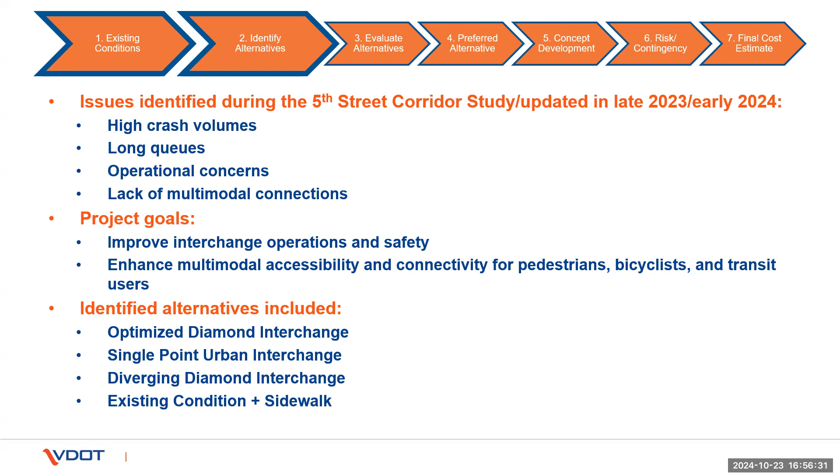This is the concept we put in for the application, which shows the DDI. It also includes a shared use path across the bridge through the median, and connects to the shared use trail that's already funded on the north end, and ties into the sidewalk on the south end of the project. This was adopted as the preferred alternative from public feedback, as well as what was initially recommended in the previous study.

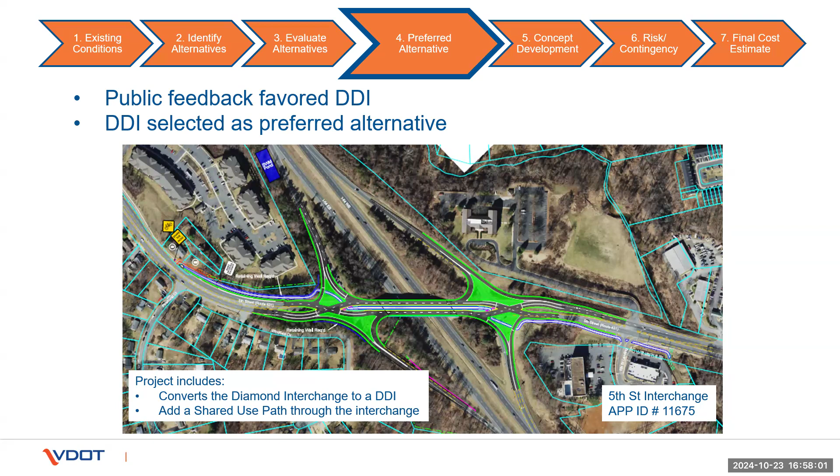So basically, this is the process we went through. We started in the fall looking at the existing conditions. By January, we identified and evaluated the alternatives early in the year, and came up with a preferred alternative by May. Then we had to develop the concepts, evaluate the risk, and put together the final cost estimate.

And that's the issue, because once you get the preferred alternative, there's no loop, or the loop takes more time than what we had available. That's why we couldn't go back and look at a different alternative with less impact on the bridge. We could have looked at a divergent diamond with a separate bike-ped bridge adjacent to the structure, and might not have had to address the bridge replacement issue while still doing the divergent diamond.

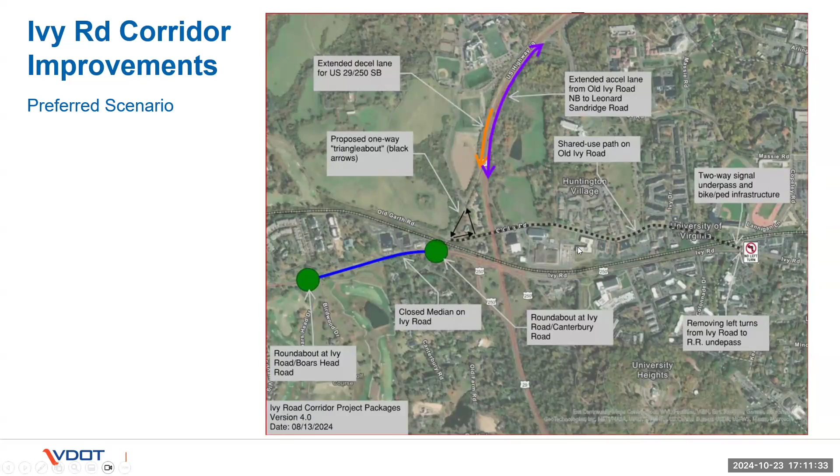Any questions about that? Well, I can go into the other ones. There's some other long-term recommendations—I mean, suggestions, not really recommendations. There's not a lot of needs out to the west of there where you really need to look at these right now, but we looked at the whole corridor to provide some suggestions to the county as to what they may want to consider if they want to pursue projects out in this area, or when needs start to develop. Right now there's not a lot of issues out there currently, but these would be there for consideration.

The connector road, which makes sense. There's stub outs at the east end and the west end.

Roundabout at Farmington—now, we could do this. I know there's been some skepticism about it because of the railroad crossing. But if you add a left turn lane and signalize the left turn lane and the right turn lane in the westbound direction, when the railroad crossing is closed, the roundabout would still operate because you could just stop those volumes that would be going into Farmington, so they wouldn't enter the roundabout. So there's some options there, but like I said, these are some long-term solutions if the county wants to consider them.

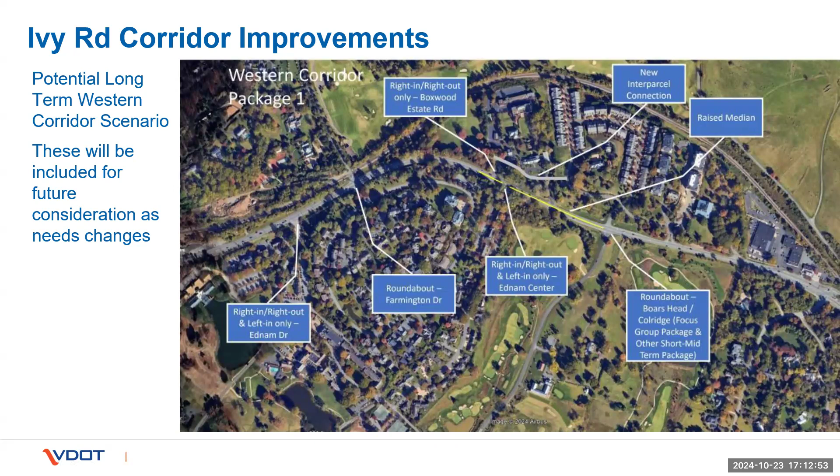Is there—I can't tell from this map—is there any bike ped infrastructure?

Out on these, when we did the study, we weren't really sure, because there's a Three Notch'd Trail study, so where the trail's actually going to go and where the facilities would be are still up in the air. We're not precluding it in the study. And I know when we did some of the initial work for the White Gables development, we actually had a shared use path shown on the concept along 250 for a short section of the road. It was never built as part of the development project.

But we need to figure out where they want to run it, because you could run it through the south side through the Boar's Head property. There's a lot of options, so I didn't want to put it somewhere and have that not be where we're going to put it, so it's left open for future consideration.

Okay, thanks, because I know there is a bike lane when you get closer to town on 250.

Yeah. So, once you get to Old Ivy Road at the east end, the shared use path, you can actually take it all the way to Old Garth Road. The issue is going to come in at the underpass at the west end, because there's not capacity there for getting bikes underneath the underpass. So we need to know where the Three Notch'd Trail is going to go before we can really plan where we're going with the bike lanes continuing west from this point on, because we don't necessarily know where the alignment's going to be.

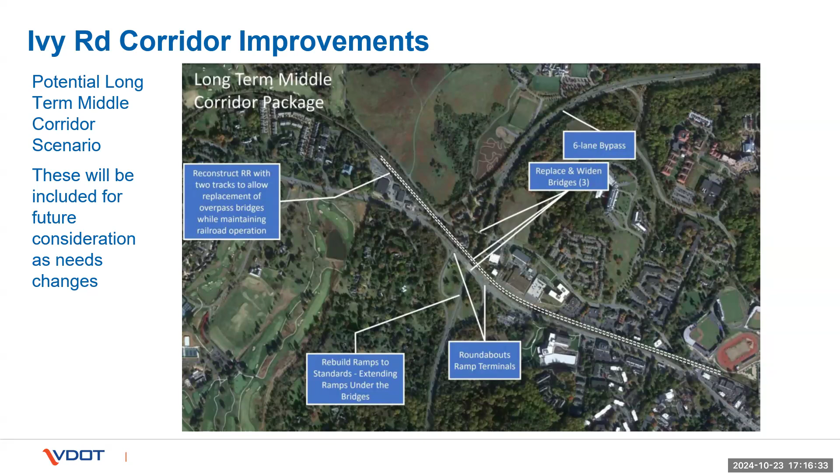Let's see, the next one is the stuff on the east end. These are some other additional improvements that the city or the county might want to consider for the various intersections between Old Ivy Road and the interchange.

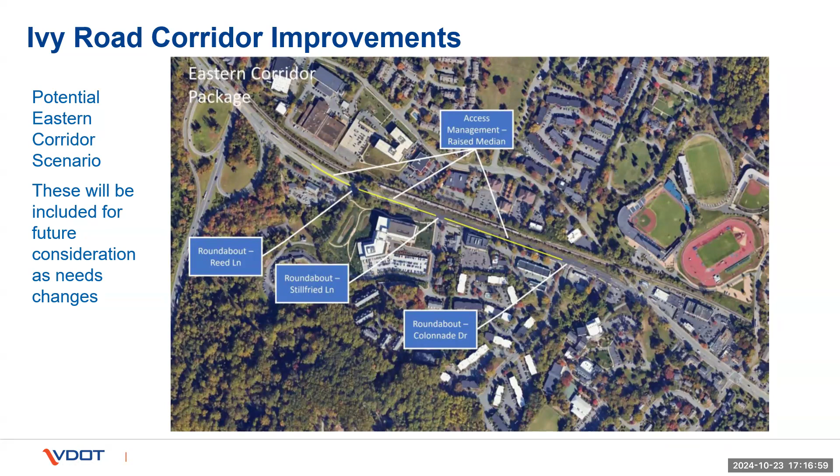That's pretty much it. Like I said, we've done the analysis on the east end, and it will work based on the analysis, but we're not sure from a safety perspective if we can make it safe for vehicles. We can make it safe for pedestrians, but we're concerned because the vehicles aren't going to be able to see each other, and there's such a long distance between the stop bar on the north side of Old Ivy Road and the intersection on the south side, that people might get in there when they're not supposed to be and cause a problem.

So that's something we'll have to evaluate, but the analysis shows we can make it work from an operational standpoint. We're working on developing high-level planning cost estimates for these improvements, and once we get those, we'll be finalizing the study. Any questions? That's my last slide on that.

Assuming the university's been part of these conversations? Yes, we've presented this, and the county's presented it to the board. We presented it at LUPIC, and the university's been part of the stakeholders group committee, so they've been involved throughout the process.

Okay, thank you. Supervisor Mallek? Thank you very much, let me go to my list of questions here. So there was originally to be significant work as far as the pipeline study on Old Ivy Road, from the access to the northbound bypass and the eastern trestle. I don't see any of those improvements in your list, unless I was blind and didn't see them.

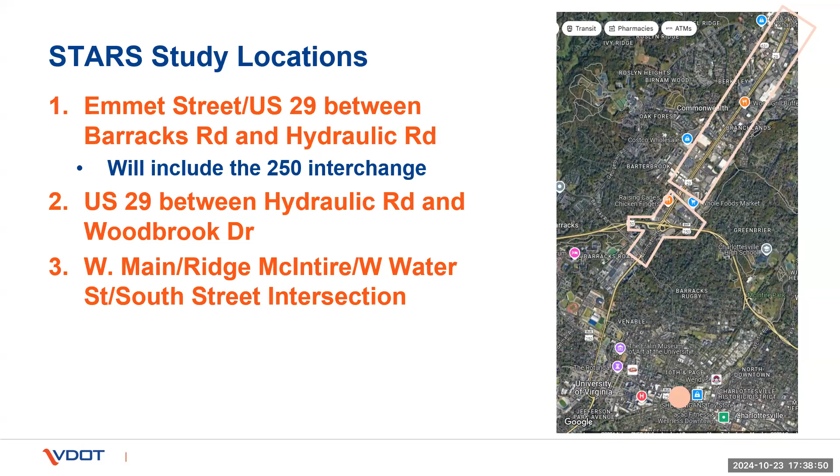So those are the three studies we have moving forward for STARS. Any questions about those? No. All right.

So, anything? Ann, question. Oh, Ann, go ahead. Yes, thank you. Is there more length to come on the newly extended left turn lane on eastbound bypass to northbound hydraulic? I think somebody's project added five or six car spaces there, but it still unfortunately jeopardizes the left lane all the way up to the bridge, and that's a little scary location as well.

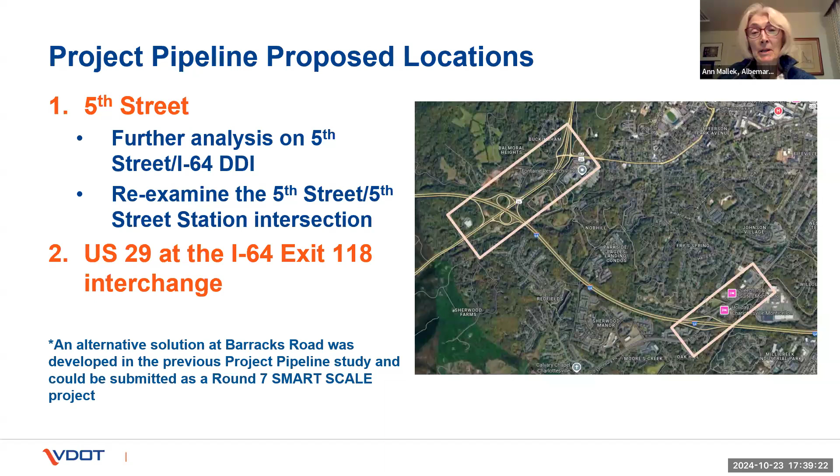I'm just checking on the process. We'll relook at that. That was something that was part of the application currently being built right now, which included the roundabout and the improvements at Hydraulic. They added that piece to the project, so we're going to relook at all of that to make sure there's not something else we can do to further improve that area. Thank you.

All right, pipeline studies. These are the two pipeline locations. Like I said, we're going to look at the 5th Street corridor, the eastern one on this diagram, basically starting at Harris Road and going all the way through the interchange. We're going to take into consideration what the city wants to do on the 5th Street corridor and carry it through. We'll relook at the improvements previously recommended for the intersection and submitted for Smart Scale, to see if we need to change those and get something that might work better than what we've already tried.

The other application is the 118 interchange. This has been looked at several times. We addressed one of the issues mainly on 64 by closing one loop ramp, but it's creating issues on the 250 south or 29 southbound direction in the PM. So we want to relook at that to see if there's anything we can do to improve that operation. We also want to look at the park and ride lot—there's a little one on Teal Lane just south of the interchange—to actually make it a proper park and ride lot as opposed to parking on the side of the road.

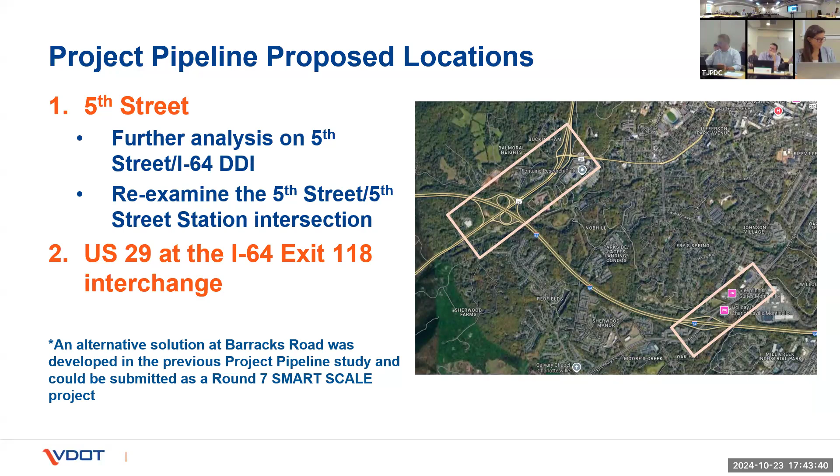Very good, that will take us to number 6, staff updates and meeting schedule. Christine? Yep, the first one is a Safe Streets and Roads for All update, and that is Gorion and Sarah online, reporting in from the governor's transportation conference, not housing. So Gorion. Thank you, Christine.

Just want to be very brief about this. Since our last meeting in August, we conducted 6 site visits in each jurisdiction of the Thomas Jefferson Planning District Commission, 2 of which were in City of Charlottesville and Albemarle County. I have to say that was not one location, but multiple locations identified through the high injury network.

Currently, we're working on prioritizing solutions, and soon, from November 11th to November 23rd, we'll be going out to the public for round 2 of engagement, where we're going to be asking feedback from the public. That's all I have. Just want to mention, actually, I forgot one thing.

We had our 4th working group member meeting last week, and just want to specify that meeting is not a public meeting and is only for stakeholders identified for the project. In December, I'm planning to provide a formal presentation on this topic. That's all I have. Thank you.

Thank you. Any questions for Gorion? All right, Sarah, did you have something that you wanted to add?